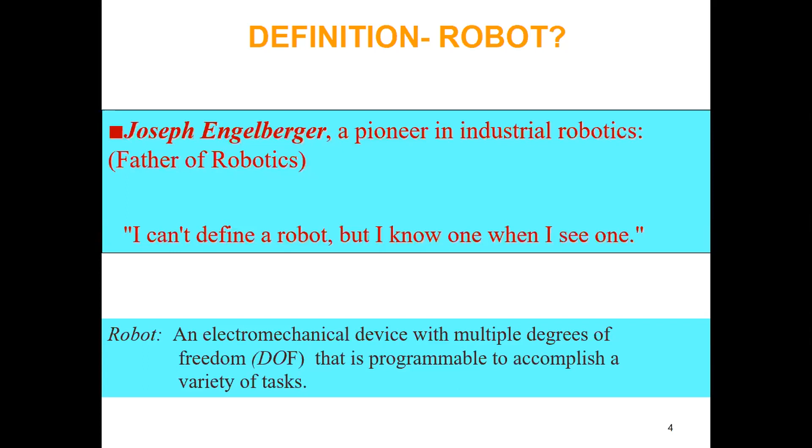So for performing a wide variety of tasks, it has to be reprogrammed, and it should be a multifunctional manipulator. That's a very important term, reprogram - you know what a reprogrammable system is, you know what multifunctional means. Another important term is manipulator. What is a manipulator? Anybody? Robotic manipulator - I think some of you have heard about the robot manipulator, some of you studying robotics. So what is a robot manipulator?

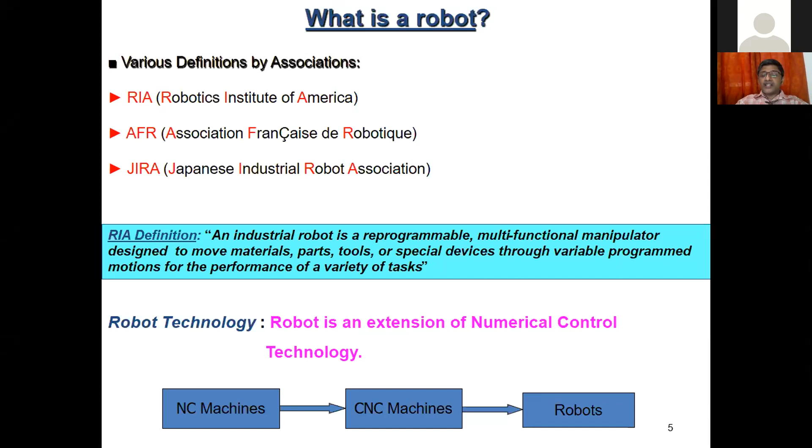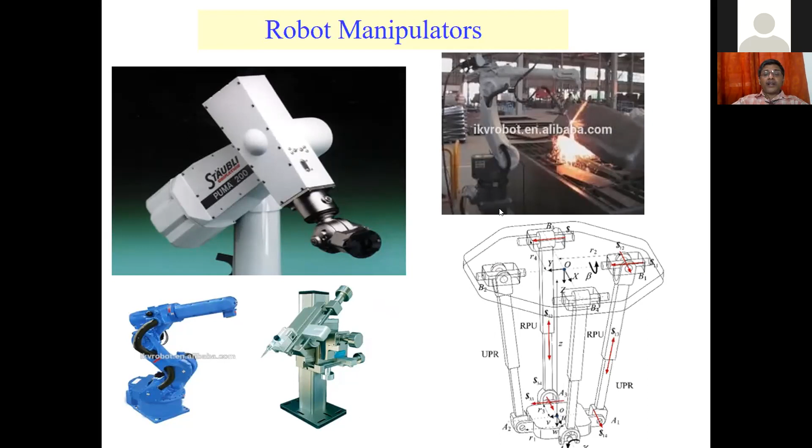You can see this manipulator, you can see all these manipulators. When we see this manipulator, there is some difference. You can see this base - the base is a closed platform. Again you have another platform at the top. Now you have another joint here, one joint here, and another joint here. Connected like that, this is known as the parallel manipulator.

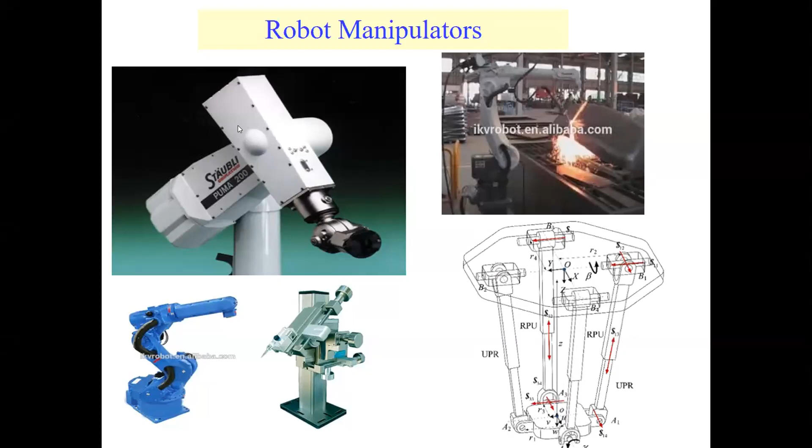We'll discuss that - this is another kind of manipulator, a robot manipulator. But our discussion is mainly focused on this type of manipulator. This is another kind of manipulator, we'll discuss that.

So you have a mechanical structure first, that is the mechanism. If you want to do an operation, you have to design the robot first - that's the first step. That means design the mechanism first. Once it is designed, you'll have a mechanical structure, that's the mechanism. But after the design, you have to fabricate it, and that becomes the robot mechanism. Once it is fabricated, you have to integrate sensors and actuators.

When we see the example of our hand, you have muscles and you have joints. So these are the joints - various joints. In the finger itself, you have a number of joints.

After fabricating the mechanism, if you want to drive it, you have to actuate the links at each and every joint. So this is one joint - if you want to move this, you have to fix an actuator here. After the mechanism is ready, you have to fix actuators at different joints. This is another joint, and if you want to rotate this, you have to fix an actuator here. The actuator may be of different kinds that we'll discuss.

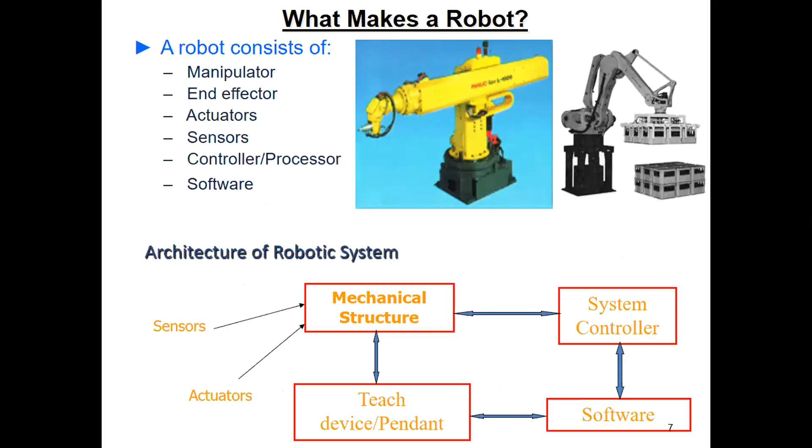Another category: you have a manipulator, you have the mobile robot. If you integrate them, we'll call it a mobile robotic manipulator. That means you take this manipulator and place it on the mobile base - you have a mobile robot that may be wheeled, tracked, or any kind of robot, and you place the manipulator above the mobile base. Then we'll call it a mobile manipulator. You can integrate all these kinds of robots - hybrid with mobile, parallel with mobile, serial with mobile, combined with wheel, track, or leg. Any kind of combination you can make.

That may be for underwater or cleaning operations, etc. You can fabricate it. So as faculty, whenever you are giving projects to students or guiding students, you can focus on these kinds of ideas. You can integrate, make it hybrid, and use it for impactful, socially relevant ideas or applications - you can develop the robot. Now that is one type of category.

Another type of category is robot classified based on size. Anyway, these robots are coming under this category too - no, this is another mode of classifying. A robot manipulator may be a macro robot, micro robot, or nano robot, or a mobile robot may be macro, micro, or nano, etc. Based on size, you can call them macro robots, and macro robots are measured in meters.

That means you can see this is my reach - when we see the shoulder, if you are standing stationary, you can move your hand and reach a maximum up to some particular area. That is known as the maximum reach, measured in meters. For example, our hand reach is maybe maximum 0.75 meters or 0.5 meters - that is our maximum reach. So macro robots means dimensions are in meters.

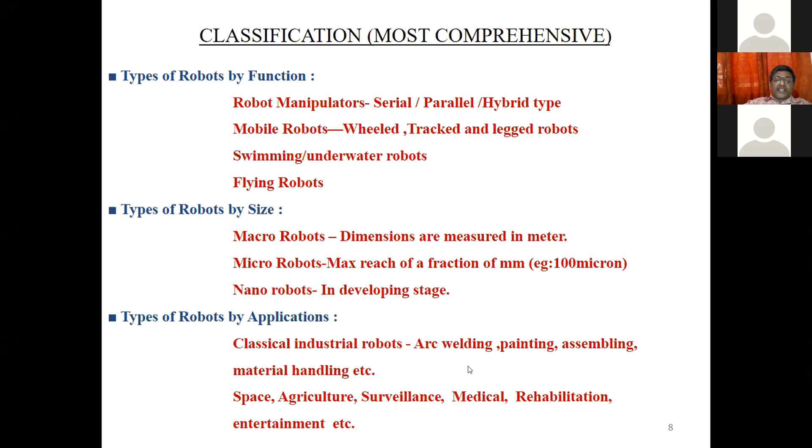Next is another type of classification based on applications - arc welding robot, painting robot, assembly robot, material handling robot, space robot, agriculture robot, surveillance, medical, rehabilitation, entertainment, etc. Depending on the application, you can classify the robot as arc welding robot, agriculture robot, entertainment robot, etc. So these are another classification of robot.

Now, when we see, you can take any kind of robot and bring it under this category. When we look at textbooks, you may not see this kind of classification because that chapter or book mainly focuses on one particular kind of robot. But any kind of robot can be brought under any of these categories.

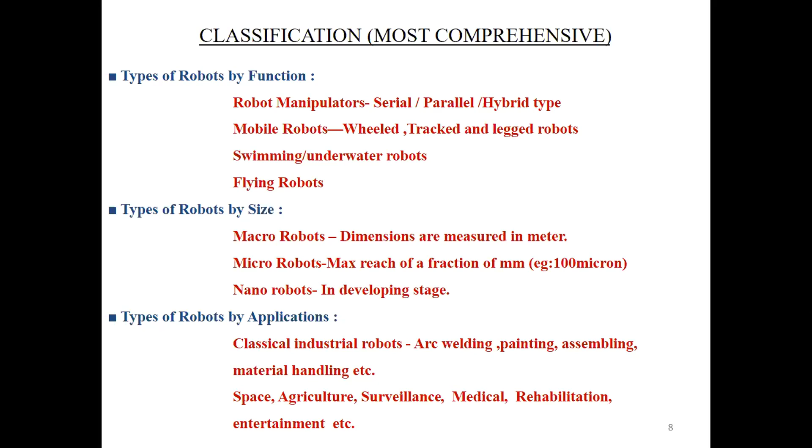So this is the most comprehensive classification of robots. Next, as I already explained, we have manipulators: serial, parallel, and hybrid. This one is serially connected, and this one is parallel, both connected in a closed loop with an end effector.

Hybrid means you have parallel mechanisms themselves, with a number of links, parallel upper and lower platforms. This is a parallel robot, this is another parallel mechanism, and this again is a parallel mechanism. But these parallel mechanisms are serially connected, open only, which is why it's known as serial. So parallel mechanisms serially connected together, we call this a hybrid robot.

Hybrid approaches are used for increasing flexibility and increasing workspace. There are advantages to this. We get the advantages of both serial and parallel manipulators if we go for hybrid mechanisms.

So these are all things we have discussed already. A parallel mechanism is a closed loop mechanism in which the end effector is connected to the base by at least two independent kinematic chains. Here we have three independent kinematic chains. At least two should be there; only then can you call it a closed mechanism.

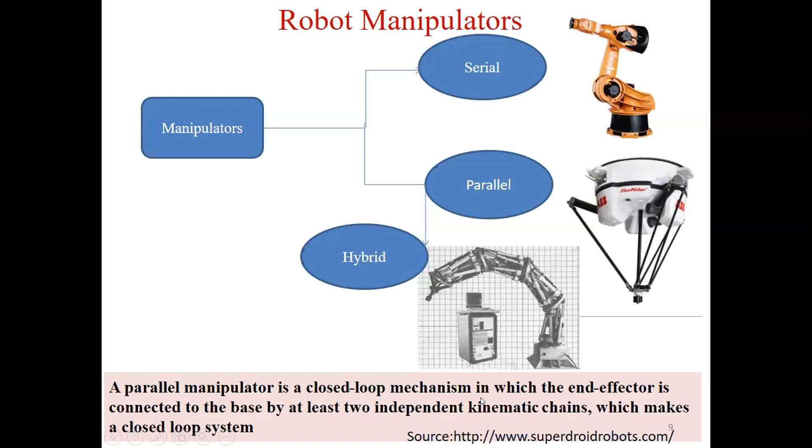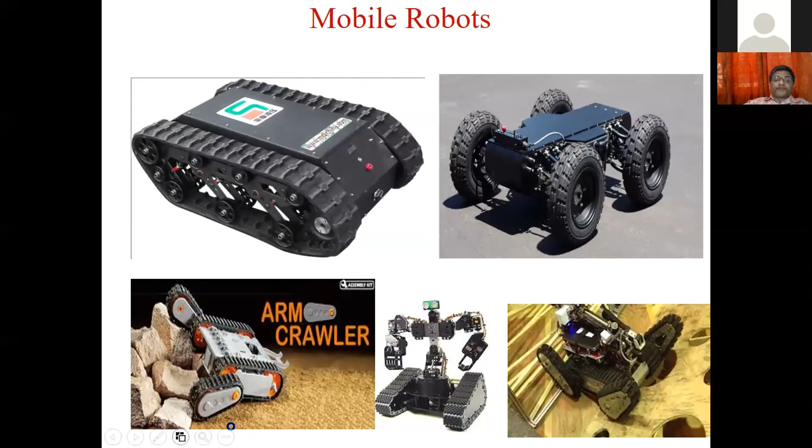These are others we already discussed: this is a tracked wheel robot, this is a wheel robot, this is a tracked robot, and this is a wheel robot. You can see this is again a track. This is again the track robot. This is tracked wheel, and this is a leg robot. Now this is a leg and wheel robot.

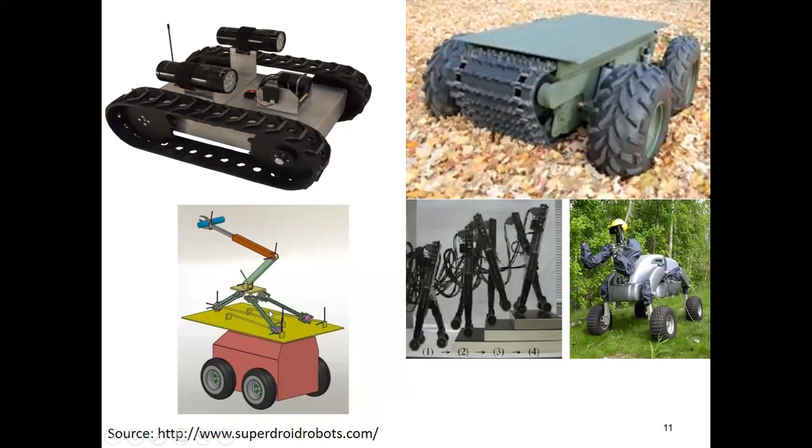You can see what I explained to you: if you integrate this, it's a manipulator, and this is the mobile base. Above the mobile base, you have a fixed manipulator. But which type of manipulator? Here you see these are closed mechanisms, this is parallel and this is serial, so a serial-parallel combination. That's a hybrid robot, and the hybrid is fixed above the mobile mechanism. So we call it a mobile manipulator, or mobile hybrid mechanism, since it has both a serial manipulator and a parallel manipulator.

Another classification I explained earlier is underwater robots and aerial robots. This one is underwater, this one is aerial. So these are the classifications.

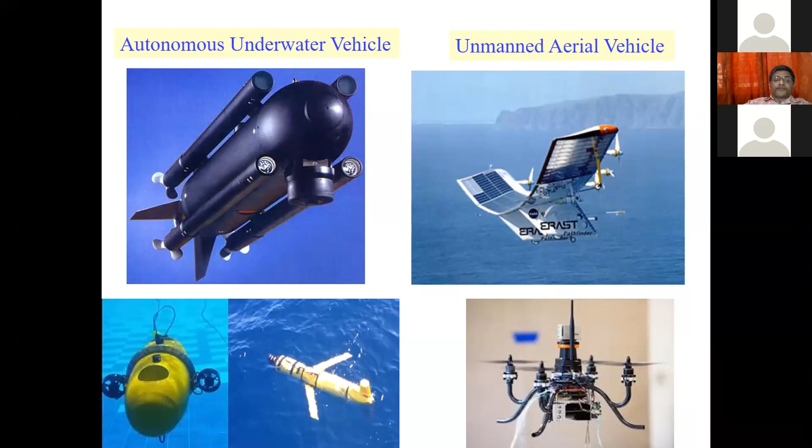Good morning sir. Robotics may help to simplify various complicated tasks and perform various tasks automatically, which may be more precise than manual tasks. Any other points to add? In case of robots, the fatigue applicable to workers may be low. To make an autonomous system able to make decisions itself. But humans also can take decisions, right? Capability to handle a number of tasks at a single time, multiple tasks with different angles, that's possible, fine.

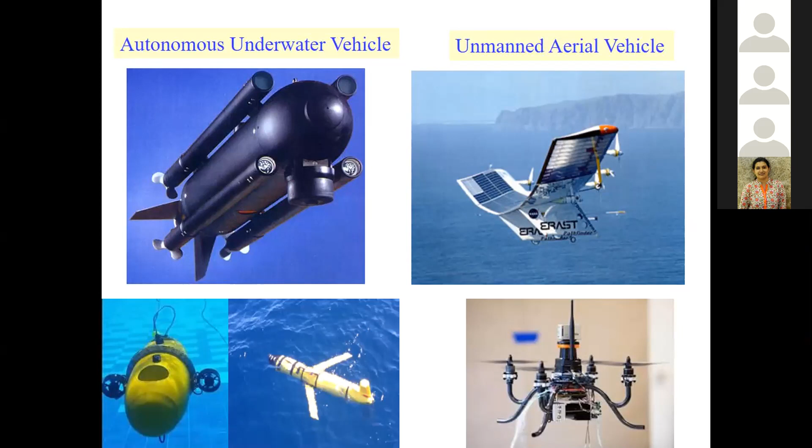These are the reasons why we use robots: increase product quality with superior accuracy and repeatable precision. You know what precision, accuracy, and resolution mean. We'll discuss these important categories. Then, increase efficiency - no need for vacation, and we can work continuously without fatigue. Also increase safety, reduce cost, reduce manufacturing lead time, and increase productivity. So these are the six reasons we go for robots - ultimately leading to high profit.

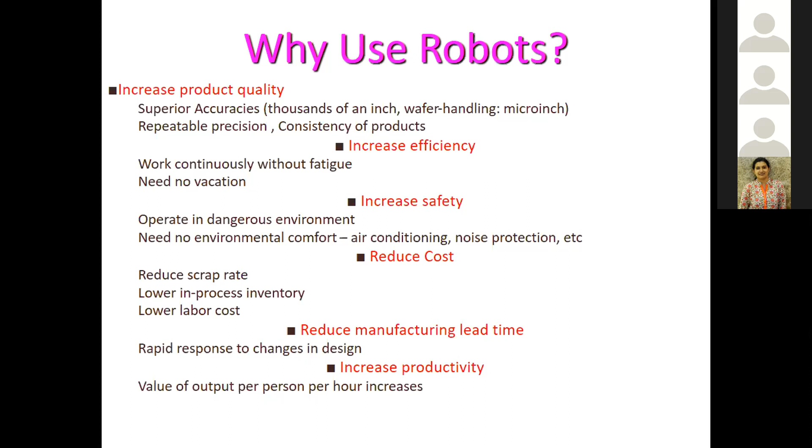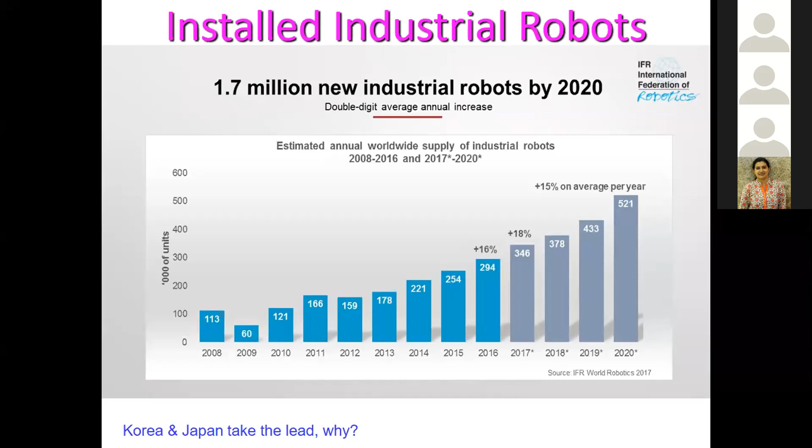What is the reason why Japan and Korea are taking the lead? They have a shortage of labor, and that's why, along with advanced technology. When we look at the technology situation in India, I'll show you the next slide and you'll get the idea.

Now let's see where India stands. This shows labor cost savings from adoption of advanced technology like robotics. When we look at labor cost savings, India's position is approximately zero, while South Korea, Japan, and Canada are leading. This is because of shortage of time, shortage of faculty, shortage of laborers, and improved technologies. You'll get a clear idea about usage of robots by analyzing this figure.

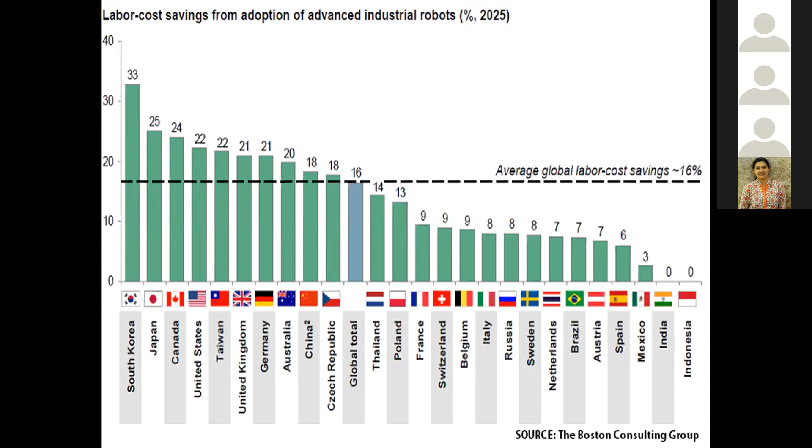Now you should know the status of robots in India. India is emerging as a destination for the production of industrial robots, and accounts for slightly less than 1.5% of global purchases of industrial robots. About 70% are used in Indian automobile industries. Indian industry is expected to grow larger in coming decades, increasing demand for robotic solutions. That's why we, the faculty, must come up with ideas, do research, and pass this information to students to motivate them in this field. That's our responsibility, and that's why faculty development programs help add value to education.

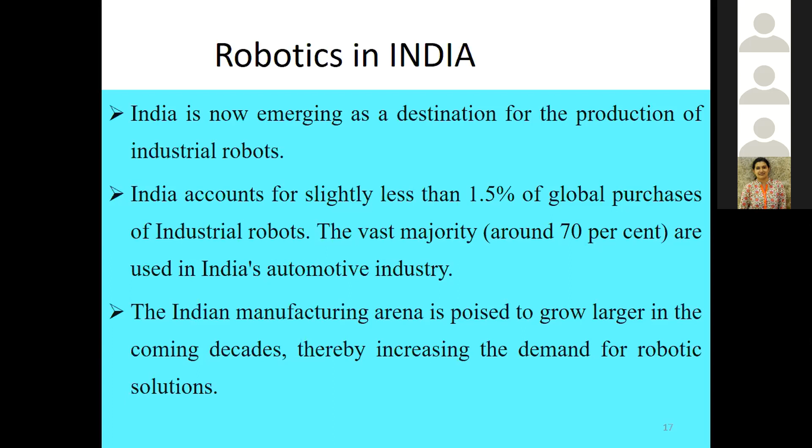Now let's see how robots are used. Looking at industrial robots worldwide, 70% are used for welding and painting operations - mainly industrial processing operations. About 20% are used for pick and place operations, and 10% for others.

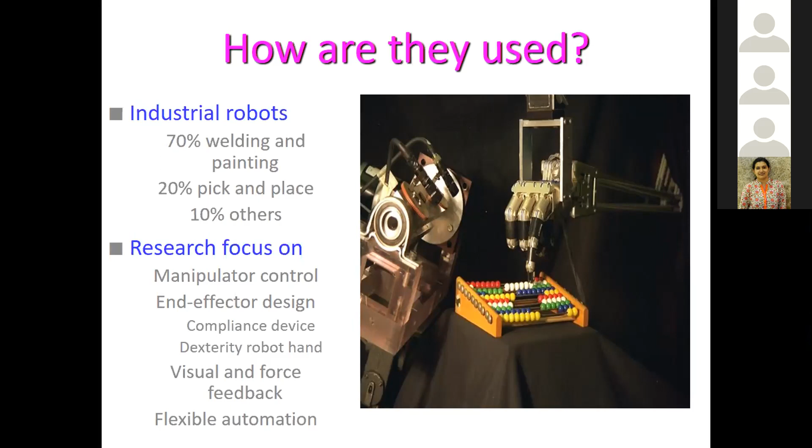Research is focused on various aspects of industrial robotics - that is, manipulators or robot manipulators. This research mainly focuses on manipulator control, end-effector design, compliance, dexterity, visual and force feedback, flexible automation, etc. Now we'll see the classification of robots.

Before classification, you should know the important characteristics of a robot. Can you say what the important characteristics of a robot are? A student responds: it may be the ability to be programmed, automated, and perceptive - whatever instructions are given, the robot works according to those instructions.

But to implement all these operations, what do we actually need? We need higher accuracy, right? So accuracy is one of the important characteristics. Then repeatability. Do you know what accuracy is? What is accuracy? Accuracy of a robot, repeatability, resolution - all these are important characteristics.

So what is accuracy? A student answers: accuracy is the closeness to the true value. Because if the robot has to pick an object, how closely does it reach that target point - that is accuracy, right? And what about repeatability? Repeatability means the ability of a robot to reach repeatedly at the same point. Then what is resolution?

So these are the important characteristics of robot. I have not included all of this, but you try to understand accuracy, degeneracy, dexterity, and some other important characteristics of robot. Now we'll come to the robot manipulator, classification of robot manipulator.

There's a mistake in the spelling, sorry for that. Now, robot manipulator. When we see the robot manipulator, there are a number of classifications of robot manipulator. This classification is mainly: one is based on the degrees of freedom, second is based on drive system, third is based on the control system, and fourth is based on the mechanical configurations.

Now you see here, the first one is based on degrees of freedom. What is degrees of freedom? What is degrees of freedom? Anybody? What is degrees of freedom?

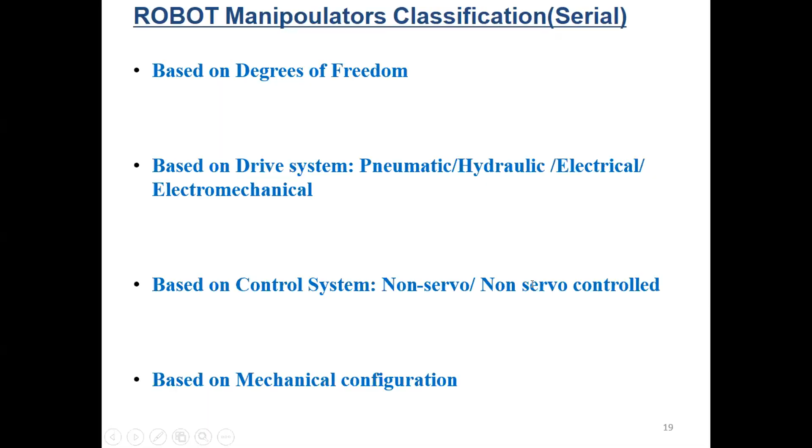Sorry, non-servo and servo control. You know what is servo control and non-servo control? In servo control systems you'll have feedback and it will be completely automated. The other one is non-servo, that is just like your mobile, your remote, you can control manually. So that is the servo and non-servo.

Servo control, you have... the non-servo, it's the simplest and least expensive type of control system, but it is also very limited in flexibility and performance. It can be purely a mechanical system of stops, limit switches and so on. You can use it, you can operate it.

But in servo control, this is capable of controlling the velocity, acceleration, and path of motion, as well as the endpoints of the path. So you can control any type of things. You can do it with feedback, and it can store complex control programs which can be easily reprogrammed in servo control. Okay, so these are the important points related to servo and non-servo.

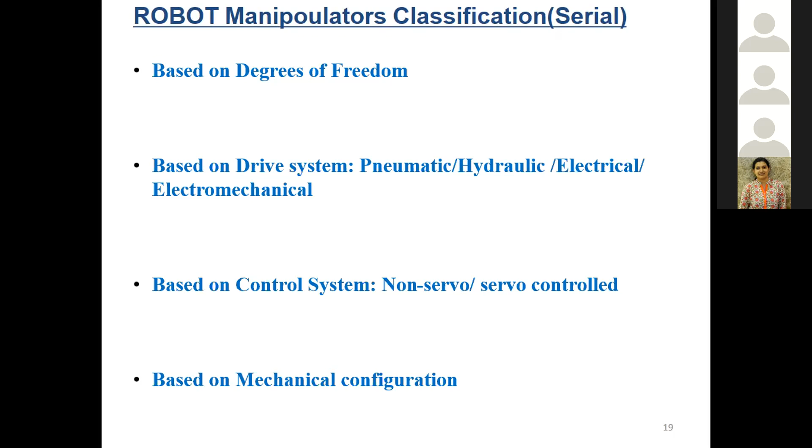That is the third one. The fourth one is based on mechanical configuration, which is very important. Based on mechanical configuration, you can define or classify the robot. The first one is Cartesian robot, cylindrical configuration or cylindrical robot, polar configuration or spherical robot, and joint configuration. These are the different types of configuration mechanisms. When we see any kind of industrial robot, you can bring it under any of these categories.

The first is the Cartesian robot. In the Cartesian robot, you can see there are a number of mechanisms. When we see a 3D printer or any kind of mechanism, you can see these kinds of motions. You have X motion like this, Y motion like this, and Z motion like this. That means the end effector will trace a rectangular workspace. You can see this is moving down, this is moving in this direction, and then this joint is moving in this direction. So finally you will get a plane.

Suppose this is moving like this. In the Cartesian robot, suppose you have an end effector like this. This is the end effector, moving in this fashion. Then moving this fashion means you will get a line, is it? And suppose this is moving in this fashion, you will get another line. That means if you are moving like this and like this, you will get a plane, right? You will get a horizontal plane.

And that plane is moving exactly vertically, you will get a solid, right? So that is this kind of motion. This is moving in this direction, moving in this direction, you get a plane, and that plane moving exactly in that direction, you get a solid. So that is rectangular configuration, known as the Cartesian robot.

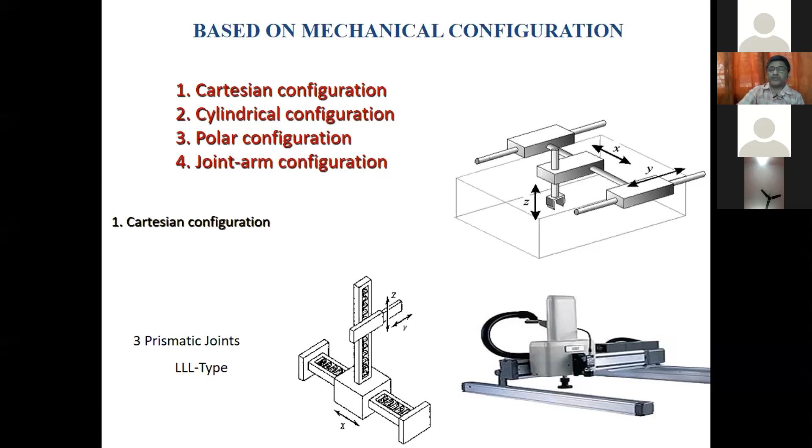Now next is the cylindrical robot. Earlier we got a rectangular volume, now you will get a cylindrical volume. How will you get a cylinder? You will get a cylinder if you are rotating a plane. If you are rotating a plane, how will you get a plane? You will get a plane if you have 2 linear motions - one motion, another motion, you will get a plane.

And that plane, if you are rotating, you will get a cylinder. So you will get a cylindrical configuration. How will you get it? If you have two prismatic joints and one rotary joint, that is two linear and one rotary, you will get a cylindrical configuration.

So we'll call it a 2PR robot, PPR, that is PP for prismatic, R for rotation. So PPR, or 2PR, or LLR, like that. Another example is the SCARA robot. SCARA is one of the well-known robots, that is Selective Compliance Articulated Robot Arm. This robotic arm also gives you a cylindrical configuration, a part of a cylinder.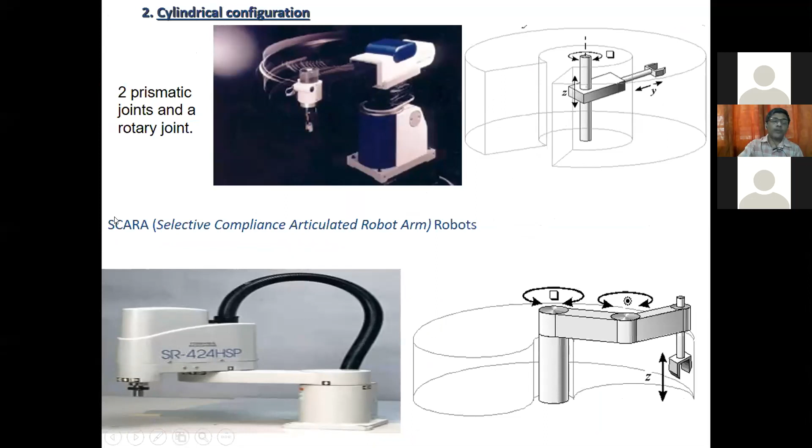You have an articulated robot, this is known as articulated robot. We'll call it a vertical articulated robot. Then here also it's rotating horizontally, so we'll call it a horizontally articulated robot. Horizontally articulated robot is a SCARA robot, and the Puma robot is a vertically articulated robot. But here the volume is the same.

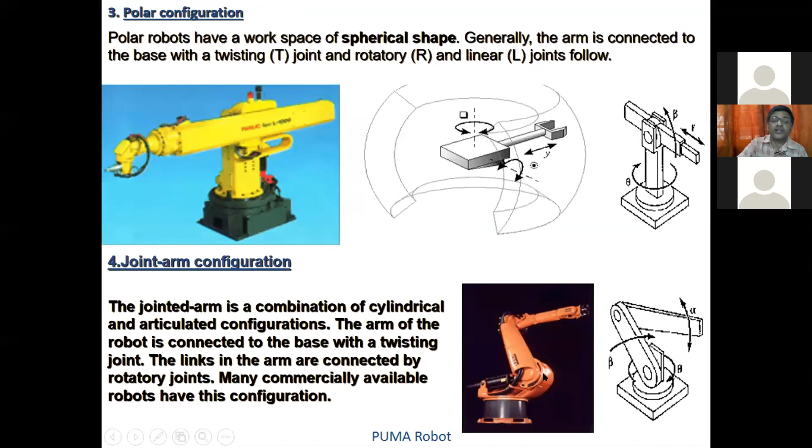And you can see this kind of robot is known as a Puma robot, used in most industrial applications for welding, painting, and other operations, generally in automobile work, or maybe for work cells in assembly operations. It's a well-known robot known as the Puma robot.

Now, another important point: as a faculty, what are the things we have to consider if you want to design, or if you want to purchase a robot? What parameters should you consider? One is size of the class, degrees of freedom, velocity, drive type, control mode, repeatability, roll pitch, payload, weight of the robot, joint angle, work volume, etc. These are important parameters to consider when purchasing a robot.

Suppose if you want to purchase a robot, the first thing is the degrees of freedom. Second is the payload, meaning how much load the robot can withstand.

500 kg, 100 kg, you can pick - that's known as payload. And accuracy, repeatability, these are all very important parameters.

Then, whether it's a macro robot, micro robot, etc., you should know. We will discuss them one by one.

If you want to purchase a robot, first is size of class - whether it's micro, small, medium, or large. You have to say the maximum dimension of the robot work envelope, that's maximum reach. You can specify it in terms of maximum reach.

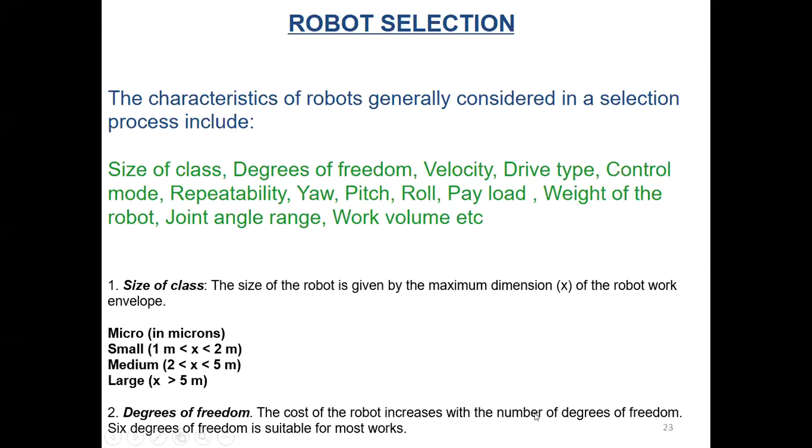The next is degrees of freedom. You can see the Puma robot - it's a 6 degrees of freedom robot. Now, degrees of freedom, as I explained, you have to specify for a particular application what is the degrees of freedom required. That should be specified.

The next is velocity, velocity considerations are affected by the robot's arm structure - that is, whether it's a cylindrical robot, spherical robot, or articulated robot, which we discussed just now. So you have to tell the mechanical configuration - what should be your work volume, whether it's cylindrical, spherical, articulated, or rectangular.

Next is drive type - whether it's pneumatic, hydraulic, electric, or electro-pneumatic, etc.

The next is control mode, whether you go for point-to-point control or continuous path control. Point-to-point mode means, suppose if you want to do spot welding operations at different points, or if you want to move from one point to another, pick up an object from one place and place it in another location - that's point to point, one point to another. Suppose if you want to do a continuous operation, that means a welding operation - welding is a continuous operation. For that you have to go for another mode known as continuous path control mode.

And next is the lift capacity, that's the payload. Whether payload is up to 5 kg, or maybe 20 kg, or maybe 40 kg, you have to specify the payload. So these are important.

In addition to that, you have to specify accuracy. You have to say resolution - the smallest increment value that you can control - and drive system, as shown here. Then you should say repeatability. These are the three important other parameters that I missed to include, and they should also be specified in robot selection.

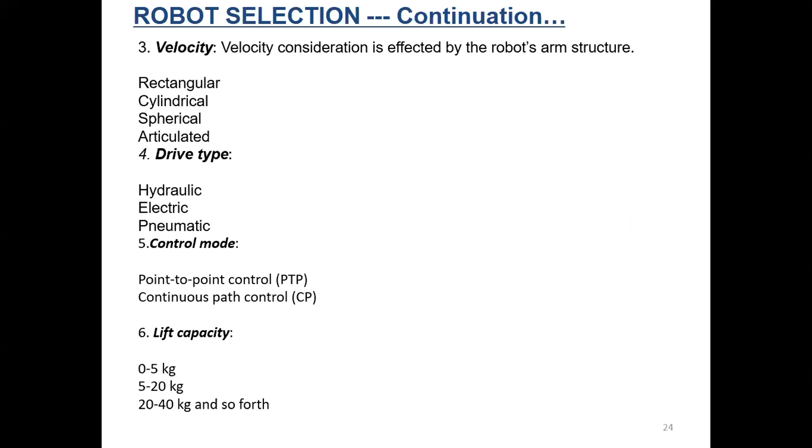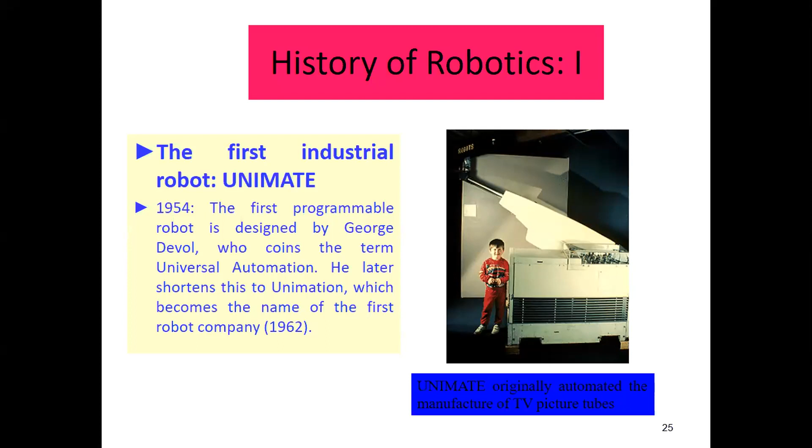Now I'm going to show some of the 2-3 robots which are very important types. First is the Unimate robot, the first programmable robot, designed by George Devol, who coined the term universal automation. This robot was initially installed in General Motors and became the first name of the robot company, Unimation. This is a well-known industrial robot, the first robot introduced and used in General Motors - Unimate.

And this is another milestone, the Puma robot. As I said, Puma stands for Programmable Universal Machine for Assembly, which I showed you in the articulated arm. This is another milestone in robotics.

And the SCARA robot is another milestone, around 1979, which was implemented in industries. SCARA stands for Selective Compliance Articulated Robot Arm.

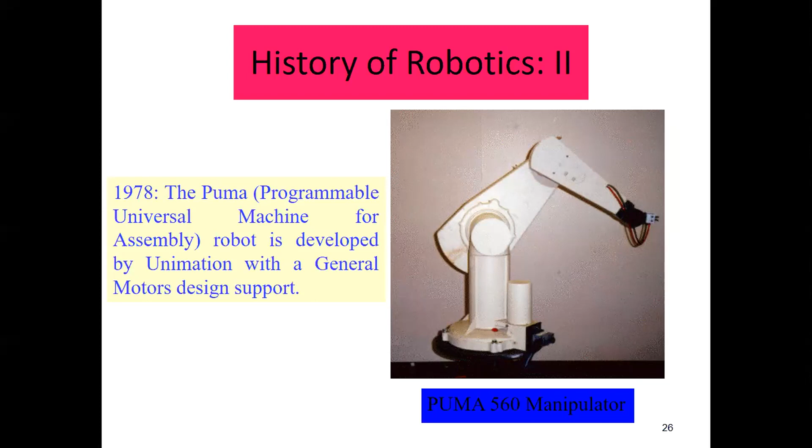Even schools have started introducing some small topics about robotics in the curriculum, even in India. So there is a lot of scope in this area to do research, and in future there will be a lot of scope, with most industries trying for automation of robots. So there's a lot of scope, but also a lot of problems that need to be solved in this area.

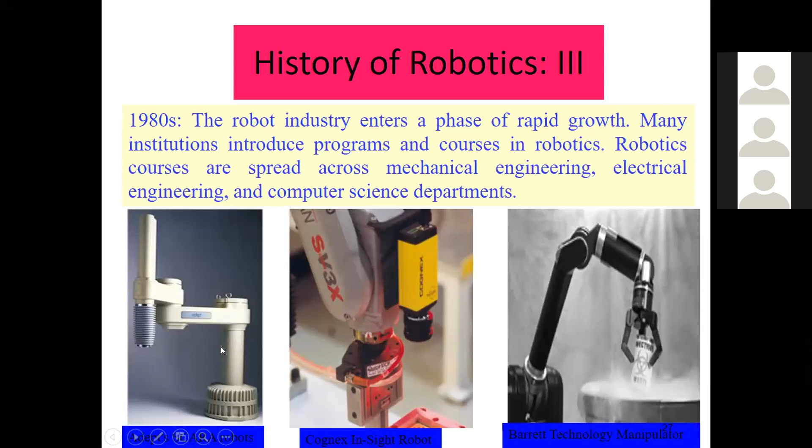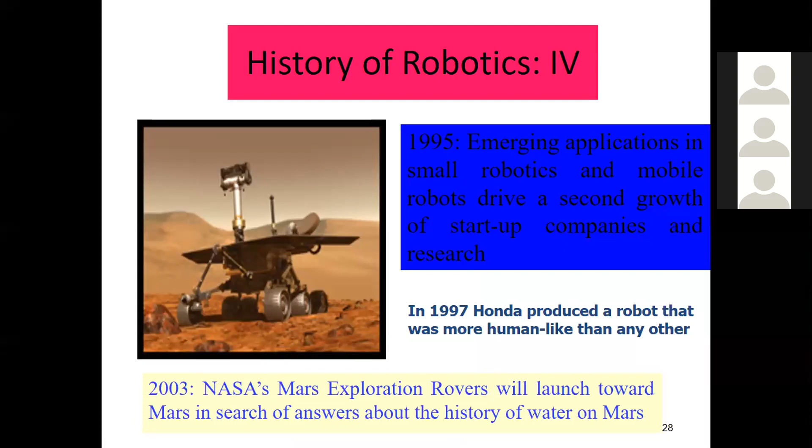This is another emerging technology: small robots and mobile robots, which started as a company and research area. In 2003, NASA's Mars Exploration Rovers, and in 1997 Honda introduced some robot. These are some important milestones in the area of robotics.

What are the important applications of robot? When we analyze the applications, mainly there are two categories: material handling operation and tool handling operation. Material handling means loading, unloading machines, assembly operations, palletizing, depalletizing.

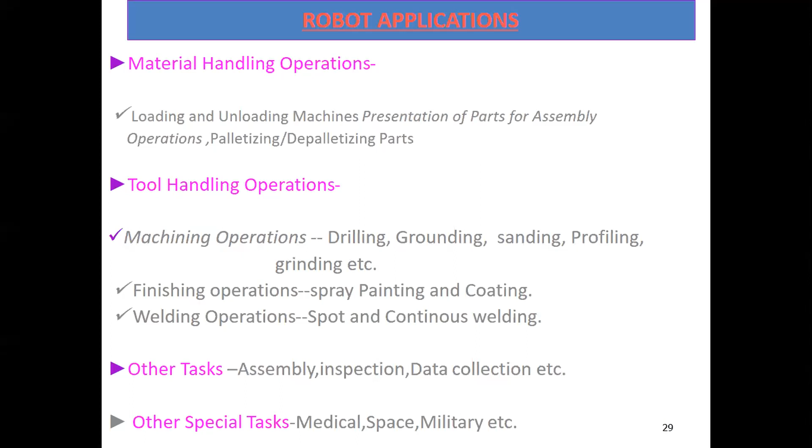So mainly two categories: material handling operations, where robots can be used, and tool handling operations, where robots can also be used. There are some other specific tasks like assembly, inspection, data collection, medical, space, military, etc.

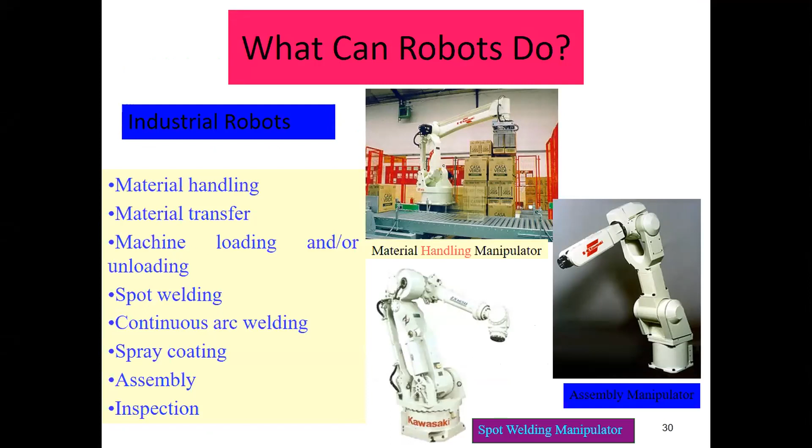Now see, industrial robot applications: material transfer, loading, unloading, spot welding, continuous arc welding, spray coating, assembly, inspection. This is a repeated task you can use robots for because of fatigue, boredom, stress, or because it's labor intensive for humans.

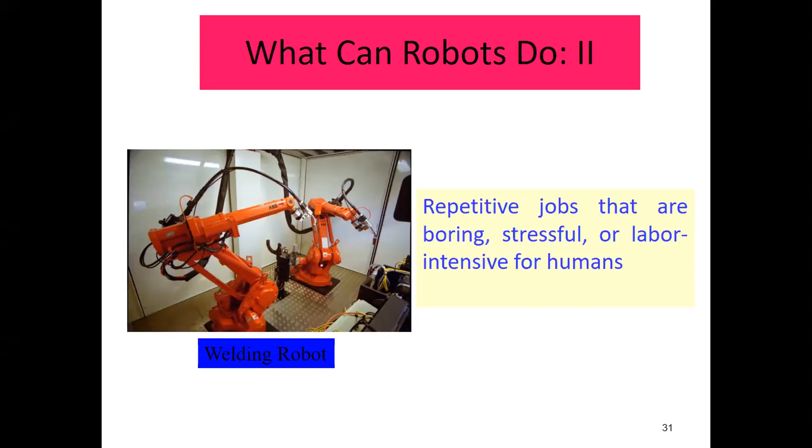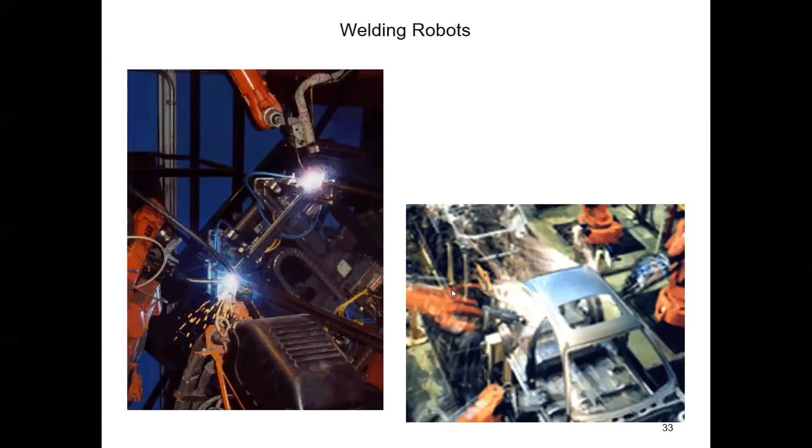These kinds of robots are articulated robots, we'll call it a Puma robot, used for welding operations - this is welding, painting, etc. Robots are also used for assembly operations, this welding robot. Generally in the automobile industry you can see this kind of applications.

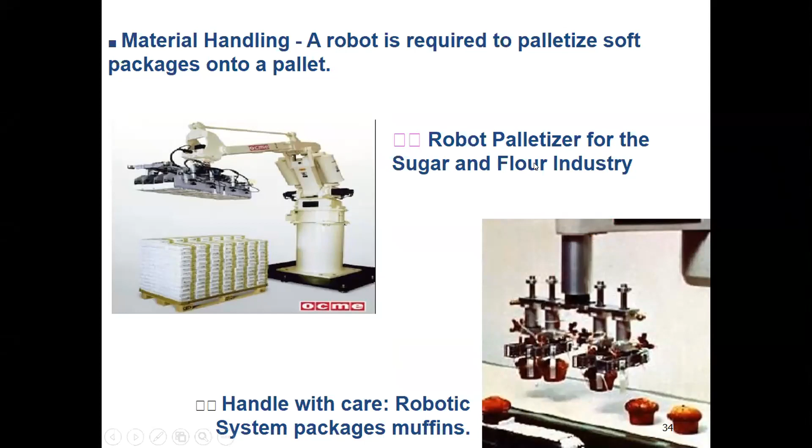Next is material handling robot required for packaging - see palletizing. This is packaging and palletizing, examples of packaging and palletizing. And you can see the work cell.

What is a work cell? In industries you can see a number of work cells, some for painting or grinding, drilling, etc. Robots can be used to present the material for different machine operations. After completing the operation, the robot itself picks the object and places it in the required location, maybe on a conveyor which moves to the next location. So for loading and unloading work cells, robots can be used.

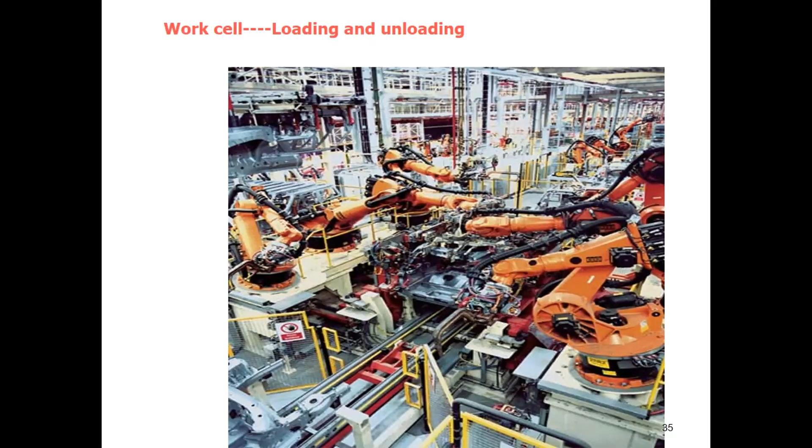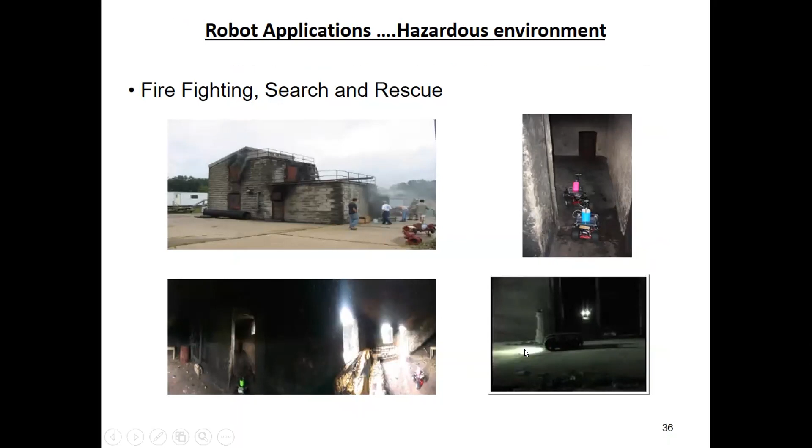Then firefighting, rescue operations, search operations. You can see search operations, rescue operations, firefighting operations, etc. Robots are being used nowadays for these kinds of applications.

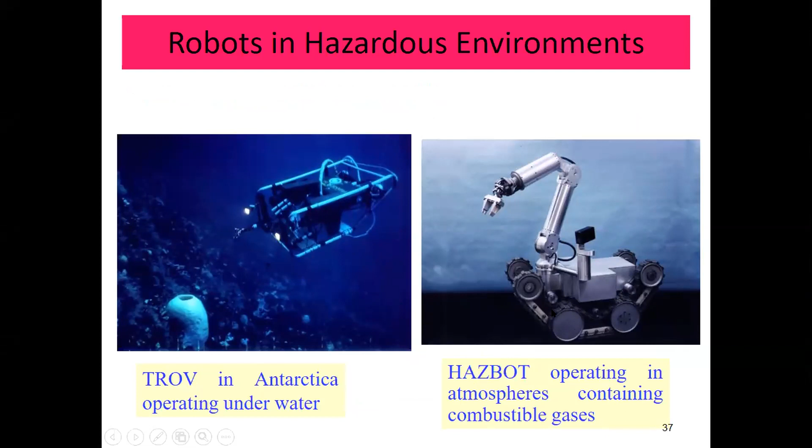Then industrial hazardous environments - sometimes humans cannot move and do the operation. So you can see the underwater robot with an arm, operating in atmospheres containing combustible gases. You can use this kind of robot in chemical industries, or for hazardous environments, maybe air pollution areas, for various applications.

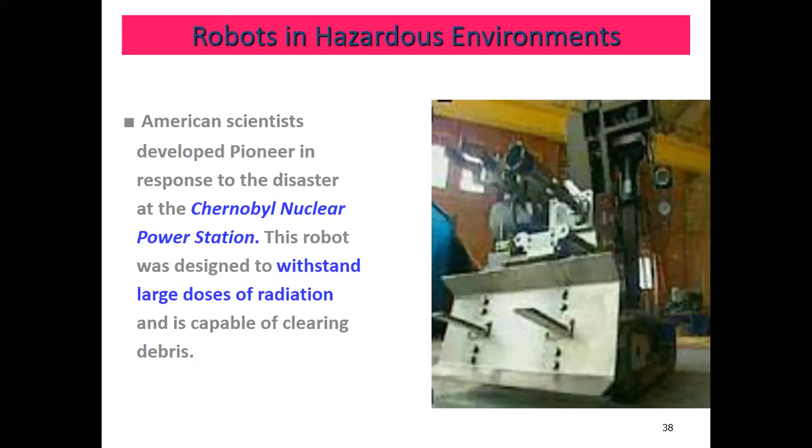Again, in hazardous environments, decontaminating robots clean the main circulating pump housing in the nuclear power plant. So robots can be used for various applications - I think you have seen a lot of application videos.

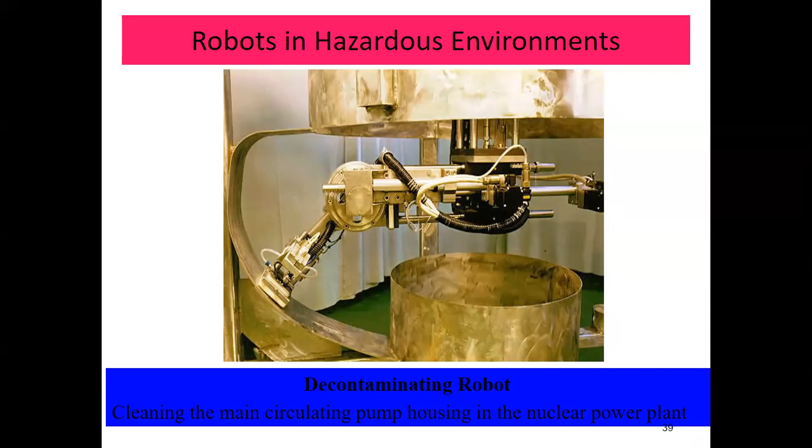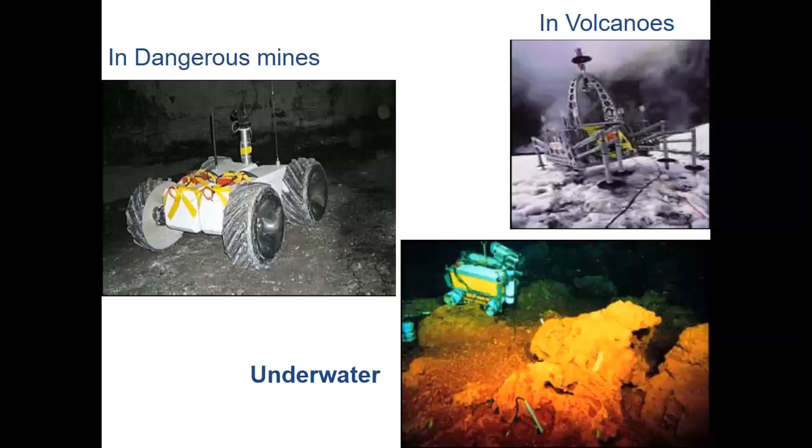So next, this is about dangerous mines, where you can use robots. And these are underwater robots for identifying some of the important creatures in underwater areas.

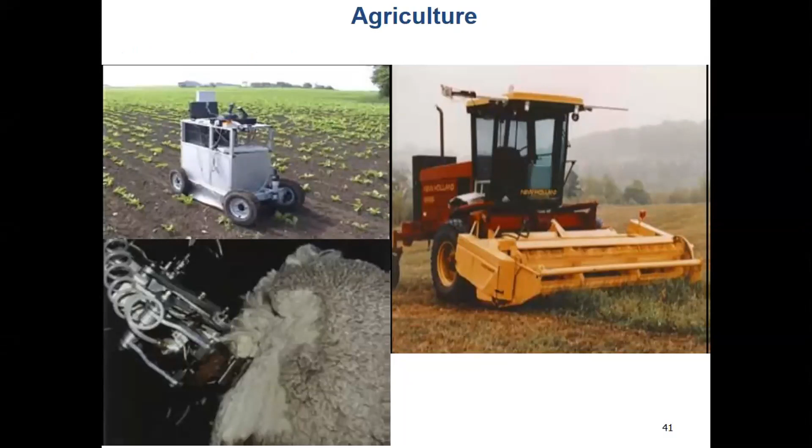You can see even in agriculture you can use robots - harvesting and all those applications. I'm not going to explain in detail, because while seeing itself you can identify what is the requirement of robot and what is the use of robots.

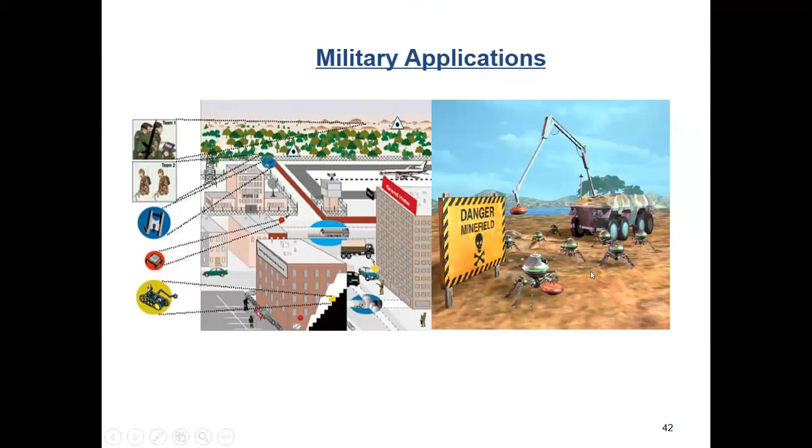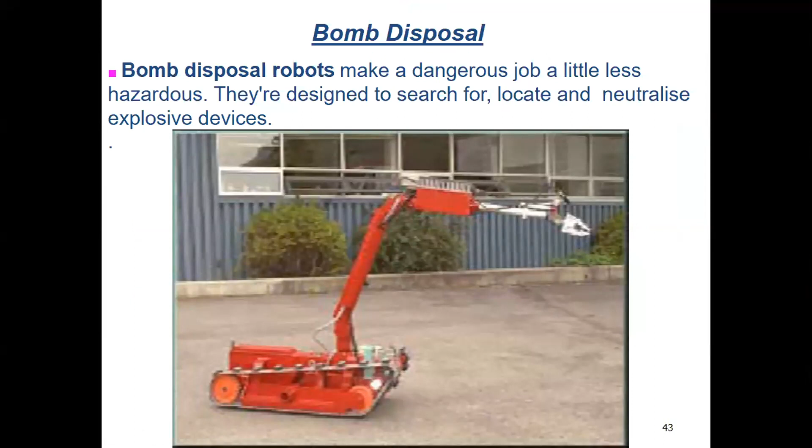Now these are the robots, generally used for bomb disposal. These robots are designed to search, locate, and neutralize explosive devices.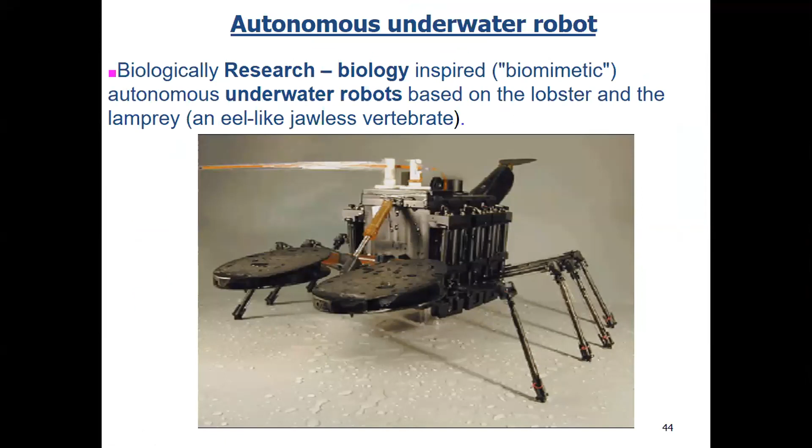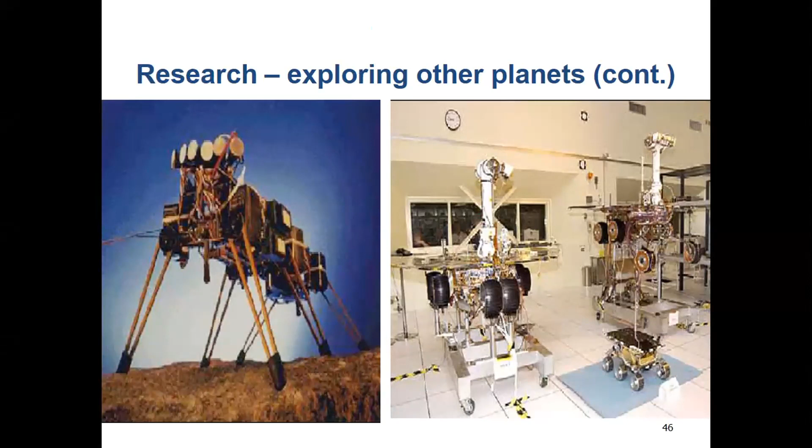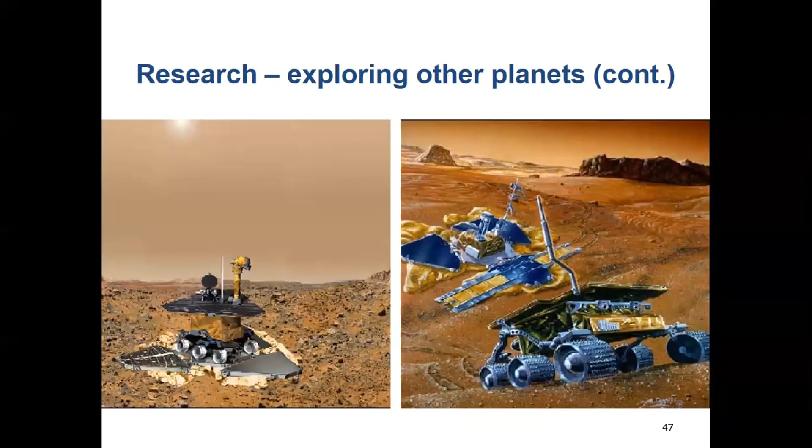NASA used robots for exploring other planets. You can see different kinds of robots, wheel robots, leg robots, different kinds of wheels including omnidirectional wheels, and wheel-leg combinations, addressing the issues of different terrains. If it is flat terrain, you can go for a wheel robot, and if it is leg-wheel or leg-track combinations, you can avoid the problem of different terrains. You can see how these robots have been designed.

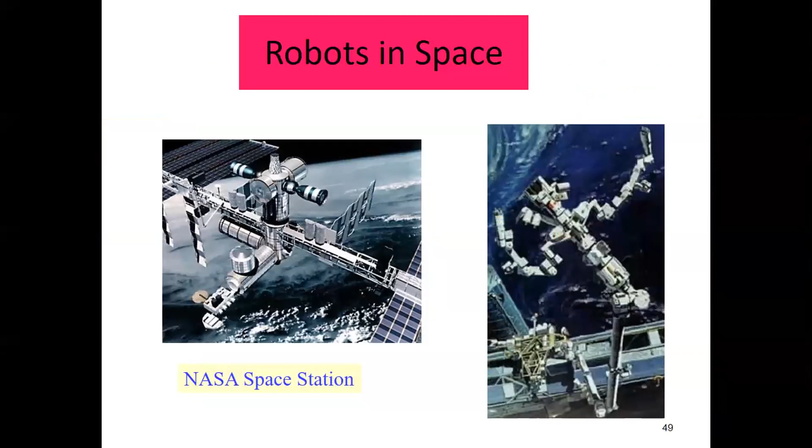Exploring other planets, you can see a robot in space. This is NASA's contribution to space research with the space station.

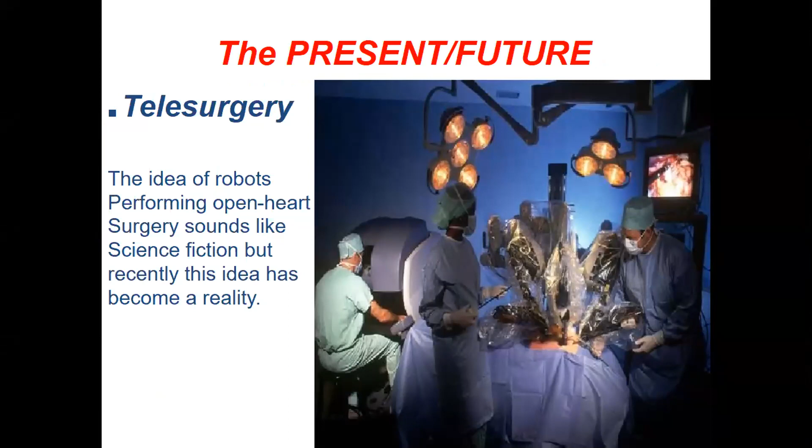Another important area is surgery. The idea of a robot performing open heart surgery sounds like science fiction, but the idea has become reality, with a lot of research ongoing in this area. Even our nearby hospital has this kind of robotic-based surgery.

With the invention of the da Vinci surgical system, introduced in 1999 by a California company, surgeons can operate on patients while sitting at a computer, performing the surgery remotely.

You'll be in one room, or maybe in the same room. You operate a master robot, and there is a slave robot. The slave robot performs the operation based on the signal received from the master robot.

So there is another important area, slave-master control. Surgical robots work based on slave and master control, that is, servant-master control.

Before discussing the recent trends, we are going to stop the introduction to robotics here. Then we'll go to recent trends, and then move to dynamics. I'll add one or two more slides to the introduction to robotics.

What are the programming methods in robots? Robots can be programmed, for example, through guiding, walkthrough, and playback, which is the first method. There are three basic classifications, and the first is guiding, generally used in industrial applications.

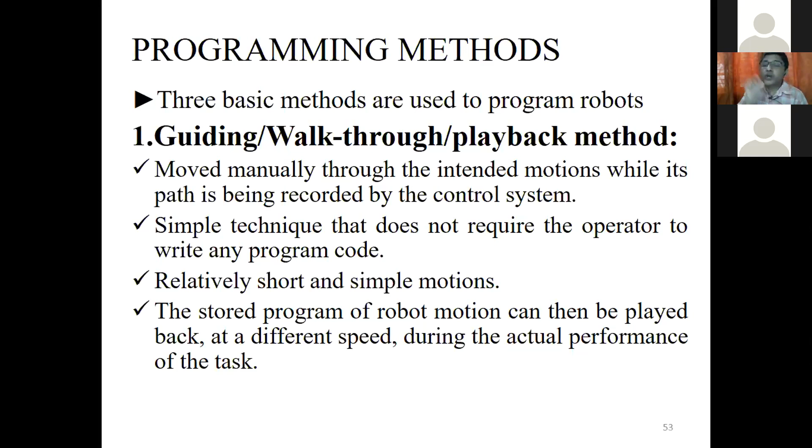While moving it, all these intended motions or path points are recorded by the control system, and you can play this back. That is guiding. So if you want to perform an operation, say welding, your end effector should move through the designed path, and while moving, the path points are recorded automatically by the control system. Afterward you can play it back. This is known as guiding, playback, or walkthrough.

Next is teach pendant and lead through. The operator or programmer can lead the manipulator through the task step by step, recording the intended motion. For example, using one teach pendant, you teach one point, then another point, then another, teaching a number of points. After teaching all these points, the system will interpolate the other points.

For example, if you have to move from here to here, one or two points can be interpolated using the teach pendant, whether linear or non-linear motion. Only the major path points are recorded, and intermediate points must be interpolated by the control system. If you want to move non-linearly, two or three major points are located and recorded, and the other points are interpolated by the control system. It does not require coding and is used for the most complex and precise tasks. This is another kind of programming method, the teach pendant.

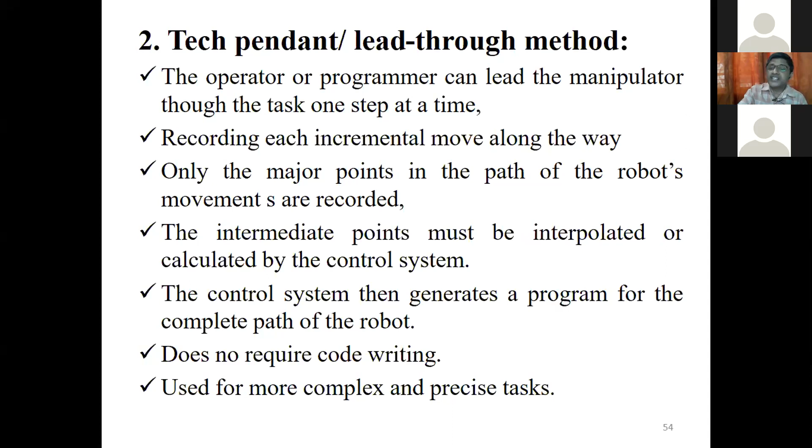That means it's a high-level language. If you want to do a welding operation or painting operation or any operations, you have to write the program. Or suppose if you want to develop a robot, you have to design it, you have to fabricate it. If you want to implement, you have to write the software. You should have a mathematical model, you have to write the software, and after that write the program, to run in any language - C, Python, or any language you can write it.

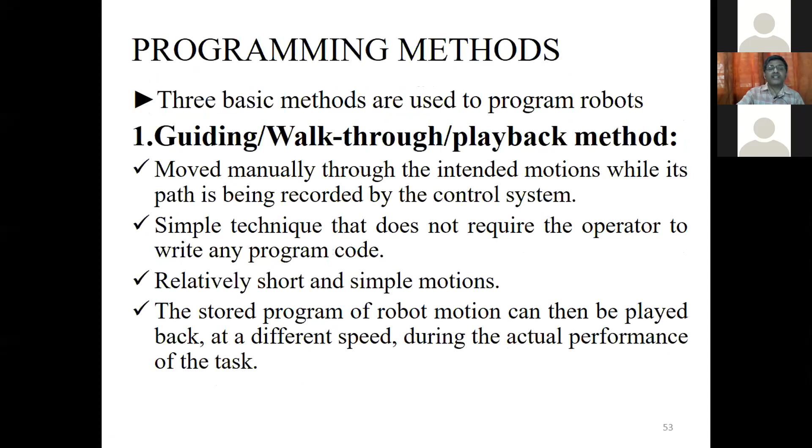In industrial robots, they have their own languages introduced by their own companies. But if you are designing a robot, you can write code in your own language, maybe C or Python or any kind of language, and you can run the robot. That's offline language. So these are the main 3 kinds of programming: guiding, teach pendant mode, and offline mode.

Next is the recent trends in robotics. So far, what we discussed is I tried to give you a basic idea of what is robotics, what are different types of robots, what is the classification, what are the characteristics of robot, what are the selection procedures or how to select the robot, what are the applications of robot, and how to program the robot. These are the important basic ideas I've given in this first part of the lecture.

Then maybe 15 minutes we'll go for recent trends in robotics. After that we'll move to robot dynamics after this session. These are the points I have to tell you. Next, we'll discuss what are the important trends in robotic research or robotics, after this session.

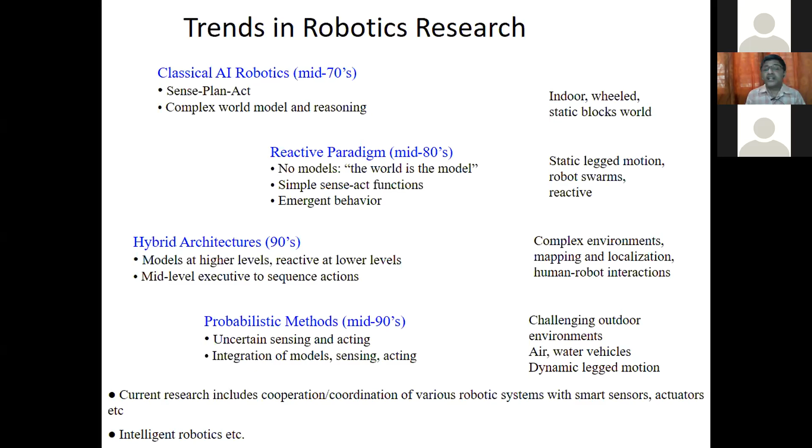Okay, thank you. Akhila, anything else to add? No sir, I think we can have a question answer session now.

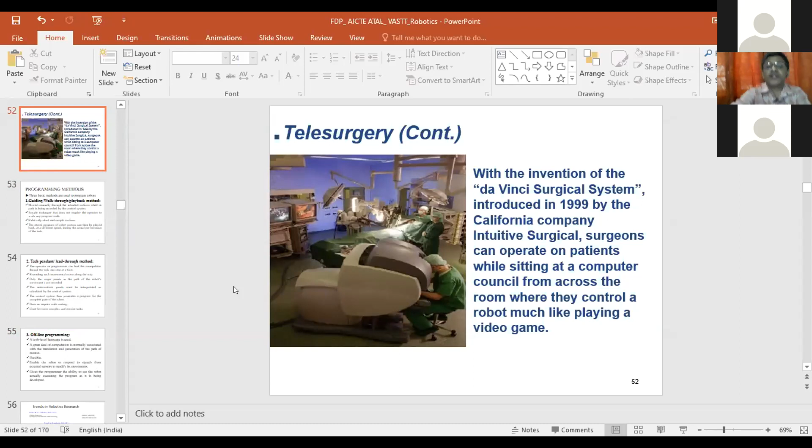Any questions related to any of the topics related to the basics? I think some of the topics we have explained, maybe it may not be new for some of the participants, but even though they may get some idea about it, or they can brush up those ideas. So basic, then we'll move to the research trends - what are the research going on in this area. If you have any question, you can ask, otherwise we'll stop now.

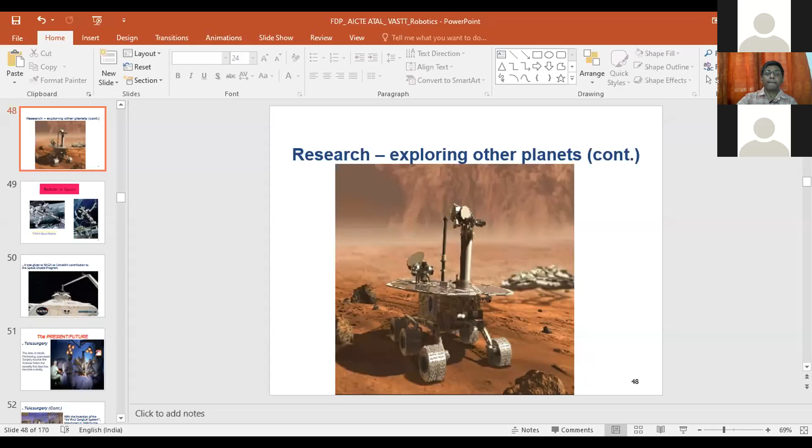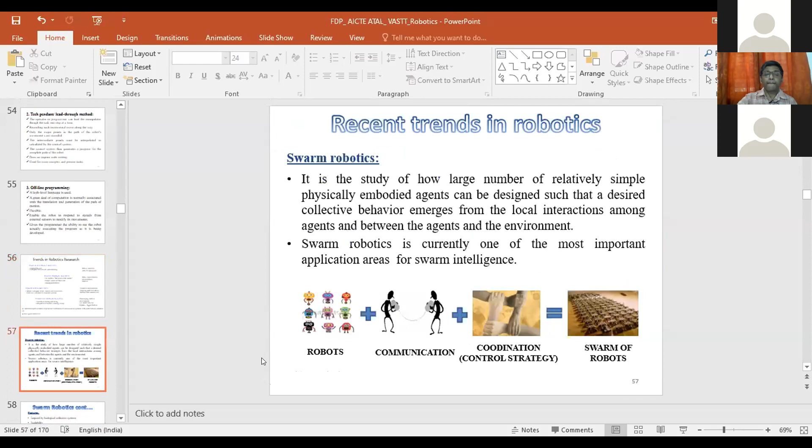Any questions from participants? Hello? Am I audible? Maybe they don't have any questions.

Yeah, okay, so these are the fundamentals. They may be knowing also, it's fine because fundamental things. Anyway, if you have any general question, that also can be welcome. Okay, we'll stop now, we'll continue after.

Then we have a question in the chat box. One minute, it's a question from Purnima Vadak: how should a beginner in this field start, and can she get to know any reference books or something for this?

At the end, I'll tell you some of the reference books. So what you can do is, I think if any faculties in your institute, you just start the work along with them, or any faculties that you can start like that. Now I'm going to explain what are the recent research topics, so I'll give you some of the interesting books, and those books you just read it. For beginners and simple books, I'll tell you, and those robotic books you have to refer.

After that, you go through the recent research topics. Then you can select some students, even BTech or MTech students, and you can give small projects based on the recent research areas. You can also join with them and you have to learn it.